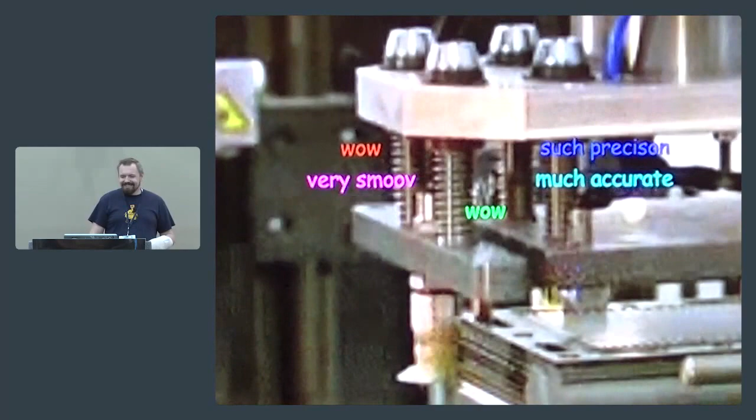So here we have, I forget what this one's actually called, the Kukubot, something like that? Kukubot, yeah. Wow, very smooth, such precision, much accurate.

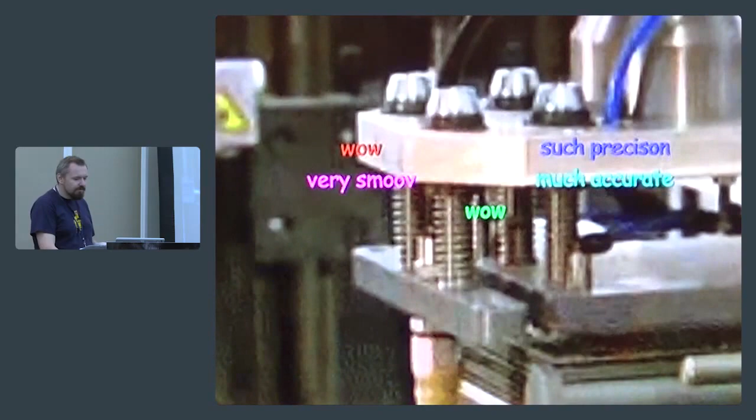But we also make robots to do cleaning for us that simultaneously entertain our pet and us. So this is a cat riding a Roomba, which I think Roombas were probably designed with this in mind, because it's got this perfect cat-sized perch on top. This GIF is missing the duck, but just imagine there could be a duck in there too, being chased by the cat on the Roomba. The internet loves ducks and cats and Roombas.

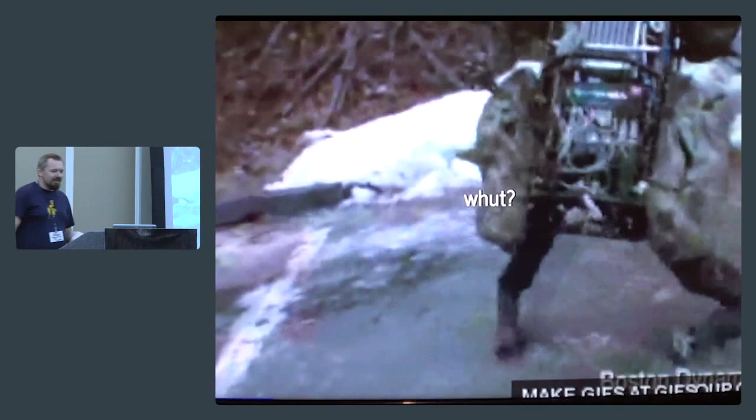DARPA - there's also things, it really creeps me out. There's a video where the guy comes and knocks it over. You kind of feel bad for it, but not for very long. So unlovable, look at it. There's some fantastic parody videos though. What makes up a robot - the robot anatomy, as it were.

Sorry for before when I said we wouldn't help you figure out how a robot thinks. I was just nervous because I really like you guys a lot.

We're going to help you figure out how robots think and dance and sing and all that. The main part of a robot is the CPU, kind of the brains part of the robot, and there are several different options for this. Sky's the limit. I think you all have Arduino Unos in your kit. It's a very popular microprocessor board. You can program it to run servo motors and do everything you'd want a robot to do, pretty much within limits. It's pretty simple, doesn't do Wi-Fi stacks or operating systems, but we have other solutions for that.

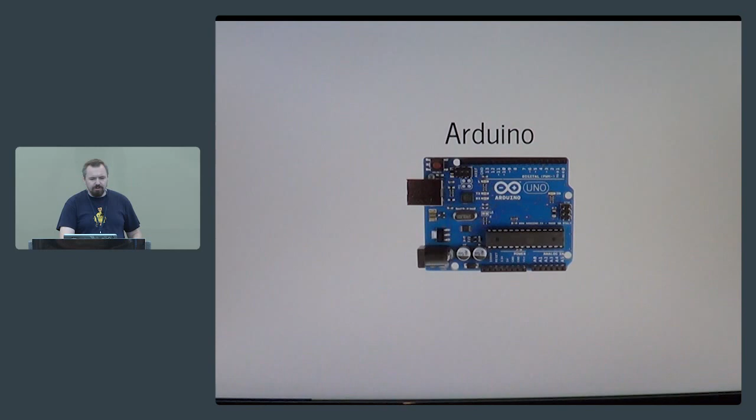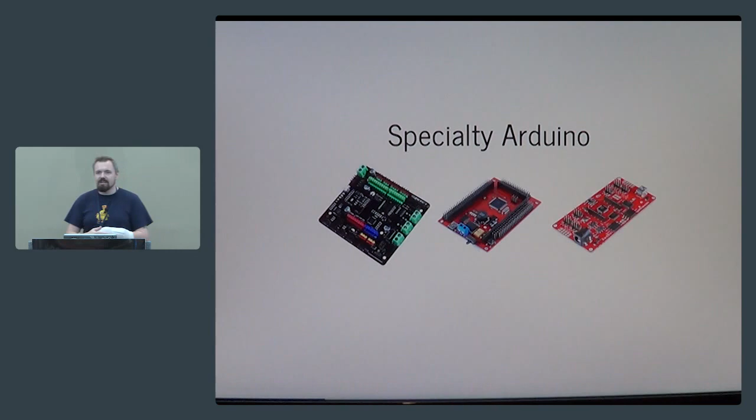There are also specialty Arduinos. Here we have the Romeo, the Spider board, and the Red board, which are basically Arduino chipsets that have extra things on them like motor controllers and power supplies, making it a lot easier because they're specialty made for robotics.

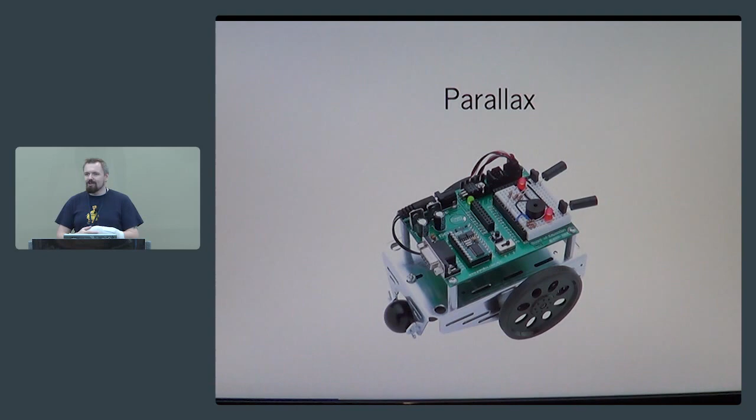The Raspberry Pi has a number of GPIO ports which control motors and things like that. It's basically like a very small Linux computer—it runs an operating system, boots up, but takes a lot longer to boot up than an Arduino by itself.

Jonathan has actually built a robot that features a Raspberry Pi and an Arduino. I'll have it on display—it runs Johnny 5 on it. I have a node server actually running Express and Socket.io, so then I have a website you can go to. It broadcasts its IP, and you can control it with a touch interface or mouse if you're on desktop, so you can drive it backwards and forwards and turn around from anywhere on the internet. It was super easy to do. If you're interested in cloud connected stuff, especially Raspberry Pi is a great base just because it's lightweight, uses little power, and is fully programmable.

Why would you use both the Arduino and the Raspberry Pi? Well, one, I want to use Johnny 5 because I love Short Circuit—that's my opinion. With the Johnny 5 and the Arduino, development of the robot is actually pretty trivial. It's sort of turn on, move forward, and Johnny 5 helps you do a bunch of that stuff. You could also do multiple boards—one for the arm, and another for the legs if you're building a walking bot—so it gives you a little more flexibility. Then I get to write full node on top of the Raspberry Pi, so I can do the web server and open sockets. Basically it just makes it self-contained. If he had not had the Raspberry Pi to run the node, you'd have to have a cable and chase his laptop around with it.

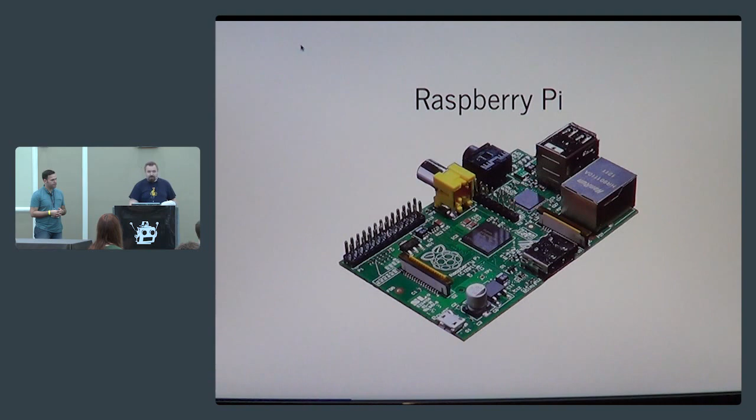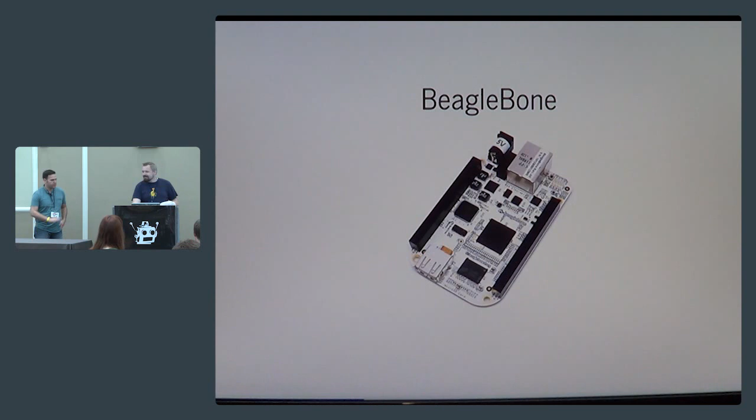There's also BeagleBones, which are similar to Raspberry Pis, but have a little bit more of everything, like more CPU and more GPIO ports. They're also maybe a little better built and organized. It's easier to hack on just because the pins are better spaced out when you start getting more advanced with the Linux base. We have a number of them around, so feel free to grab one and learn about it and use it.

Mindstorms—these are very basic bricks. You program them with drag and drop programming blocks, and there's ways of overriding the operating system to use Lego OS, I think it's called. Yeah, it's built by Lego—that's the key thing. It's a whole kit, they're pretty cool. It's a great way to get started because you can just block the Legos together, and it's really fast for prototyping.

There's a number of upcoming boards like the Tessel and the Pinoccio, which I think we'll have a couple of Pinoccio dev boards on site here, and an Espruino. Some of these run JavaScript natively, or almost natively, through a cross compiler. A lot of them are shrunk-down Arduinos that have built-in Wi-Fi and things like that. So there's a lot more down the pike than just Arduinos.

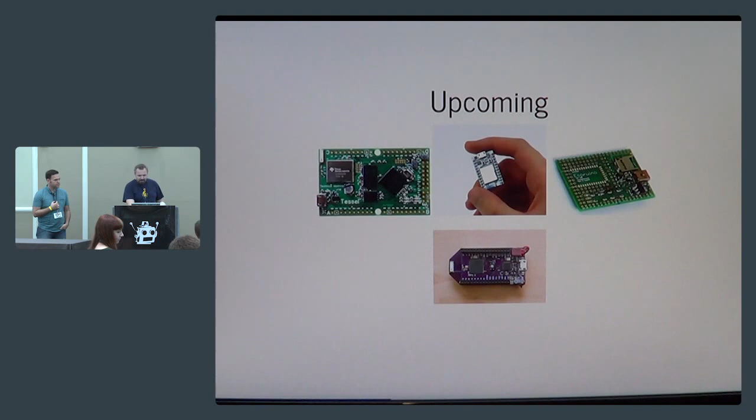We're going to talk about motion articulation, or what makes robots go. This is the Ministry of Funny Walking walk.

The base thing is a DC motor. It's basically just a DC motor. You see it in a lot of toys. You give it power, it goes. You cut off the power, it stops. You change the wires around, it'll go backwards. You'll see it in a lot of toys.

In robotics, you won't usually see this size because you need an H-bridge to make them go reverse, but on larger scale robots, like things made on wheelchair bases, you will see them because they're just very powerful.

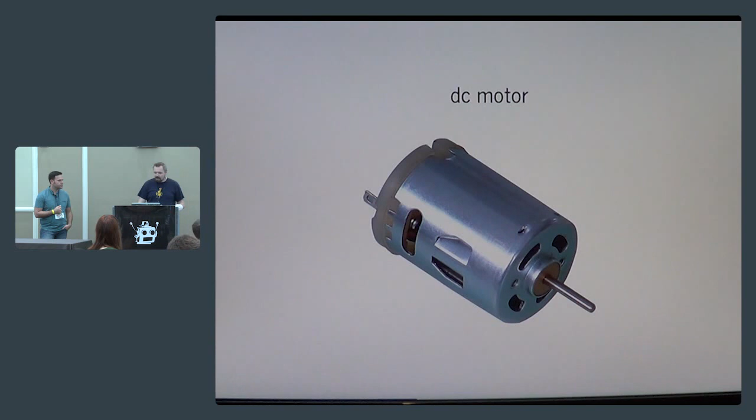More often in hobby robotics, you'll see what are called servo motors. They have a DC motor in there, a potentiometer, and a number of gears that increase the torque and slow down the motor a bit. It's a lot better for finer control.

They come in two varieties generally. Full rotation servos, which you just tell to go 90 degrees that way, and it'll start spinning that way at a certain speed and won't stop, and it can reverse. But normally they just go between 0 and 180 degrees for the standard servos. You can take a standard servo and modify it to be full rotation by taking it apart and snipping off a little bit of plastic, and you have a full rotation servo.

I believe most of what we have are S148 Futaba full rotation servos. You can use them for moving tires around and things like that, robot heads.

That's the best point. The reason you use a servo motor is for puppet-like movement. So moving a finger, maybe if you're making a cool mask or an animated sculpture. They're great because you can position a bunch of them, if you have enough pins, to an accurate position. So they'll stay in this position. I can do one more position, but there's kids around. It's a lot of flexibility with the precision.

They're cheap, pretty precise, easy to control. I don't think robotics would be around without these, or it'd be in a much funnier state. Because when you look up robot sound wave or something on Google, that's probably a servo motor sound. They're very distinctive and cool.

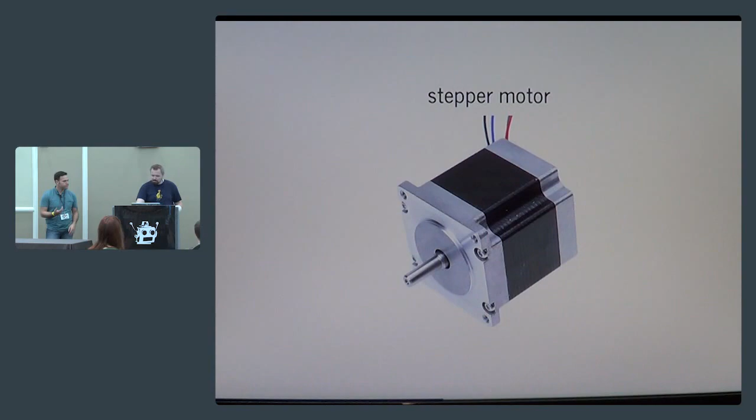So robots can move around on wheels. These are just two servo motors hooked up to wheels, and this is Susan's kitty bot, which she built for NodeBots Day. So two servo motors move the wheels independently. You move both motors forward to go forward, both motors backward to go backward. You move one of them to turn, one forward and one backward, to turn really quick.

There's a little ball caster, kind of like ball deodorant or something - it's upside down and rolls really easily. It's made out of a ball bearing and a 3D printed casing, but you can buy them pre-made. It just increases the motion, lets it slide around pretty easily.

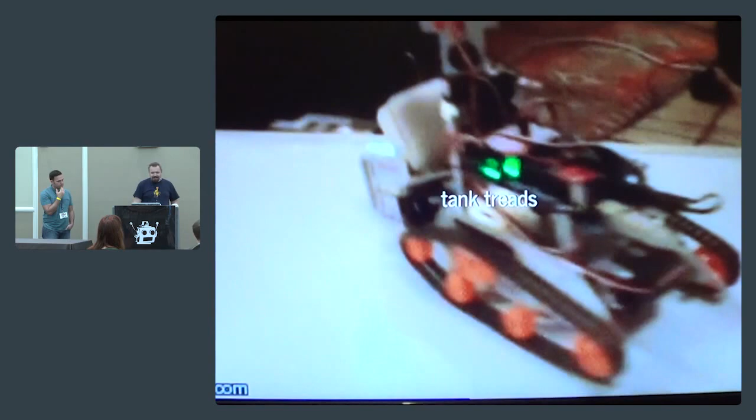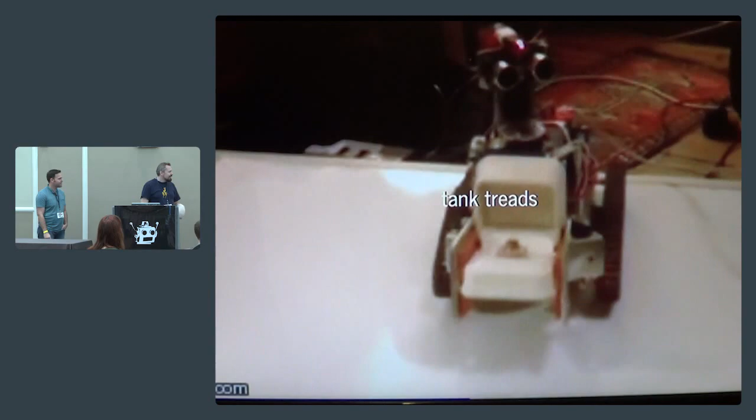You can put robots on tank treads, which are kind of like wheels but have larger surface area and better grip. This happens to be, I believe, the robot that Rick Waldron used to propose to his wife. So there it is with the ring, and she said yes. Surprisingly.

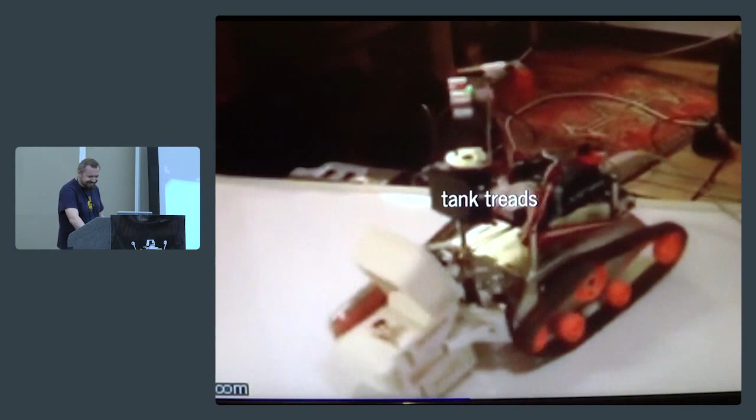There are bipedal robots, which just means two-footers. Not two feet tall, but two feet. They walk awkwardly, but depending on how many servos you have, they can have really graceful or funny gaits. They're not super practical, but they're cool.

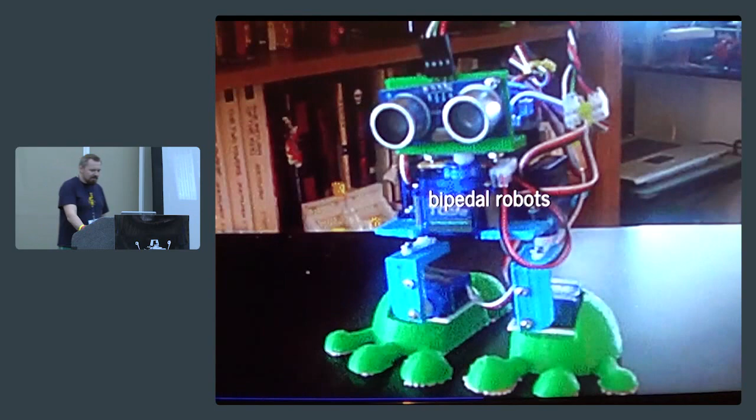You can mix wheels and bikes and create like hipster fixie bots. This one can pedal and wave, and it's really impressive, but it's a hipster bot.

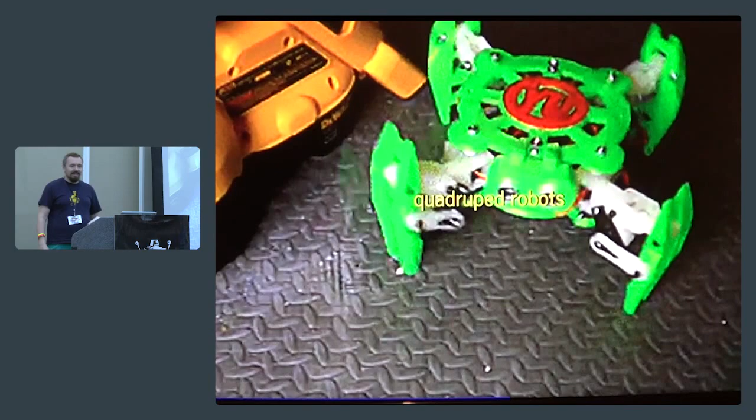You can have robots that have 4 feet, and they're quadrupeds, and robots that have 6 feet, and they're hexapods. Usually these multi-legged bots are patterned after some sort of animal movement. This one, surprisingly, is called the turtle bot, I think. It's pretty cool. Rick has a quadruped that's a little bit different than this—looks like a creepy spider. Over in the robotics table, you can come take a look at it, and it's really cool actually.

Some of you have gone to the drone room—there are robots that fly. Every time I see one of these, I think of the Terminator, Rise of the Machines, and the Matrix, but that's just me. They don't sound creepy when they're flying at all.

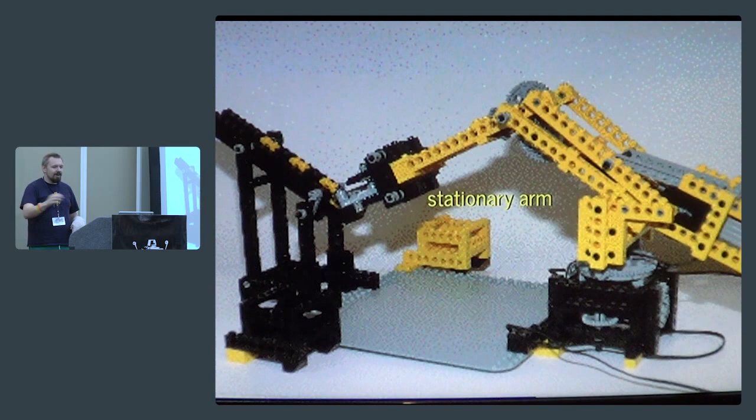Not all robots move the whole machine. You can also have stationary arms that reach out and grab things. We may or may not have a pneumatic robot arm working at the robotics workshop table soon. We'll see—if it all works out, it does.

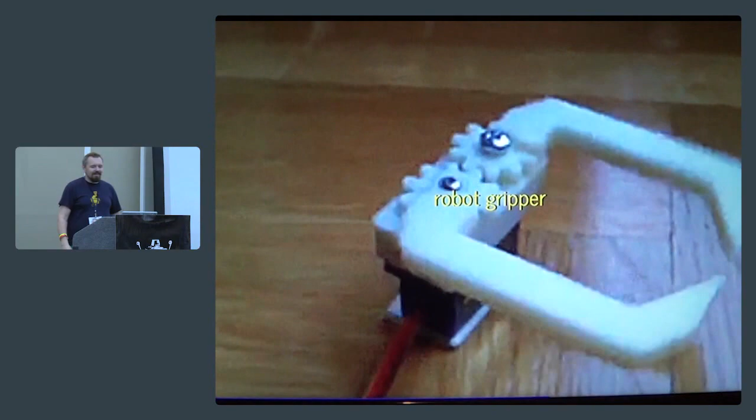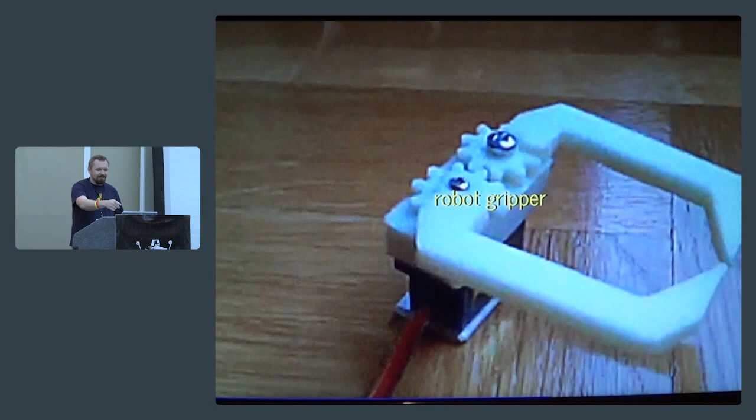On the end of those arms, this is a servo that's been converted into a robot gripper arm, which shows how articulation works. You just have little claw things, a free spinning cog and a motor-turned cog, and you have a gripper. It pinches stuff. You could 3D print this today and grip stuff, because that's what you do with a robot gripper, presumably.

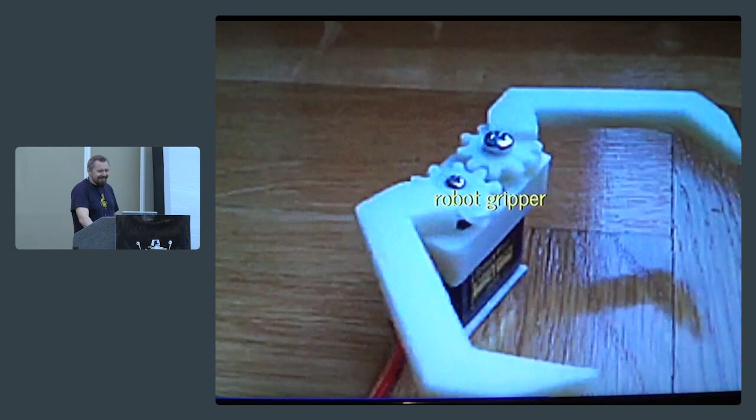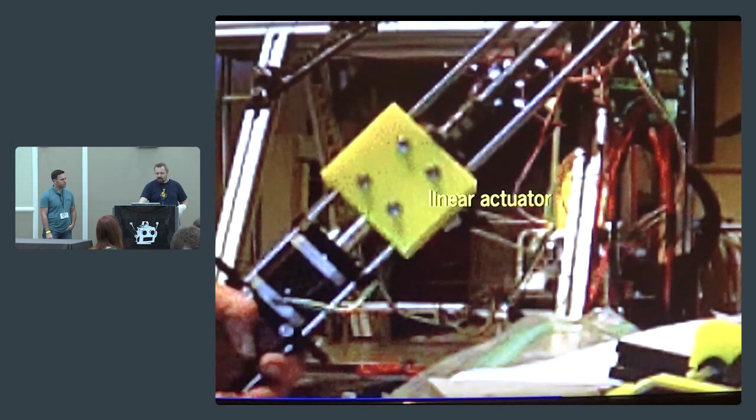Most of the motors we've seen just go round and round, but there are different ways of converting that motion into linear or other kinds of motion. This is one—it's a linear actuator based on a screw drive. There's basically a screw and a captive nut, and it just moves back and forth. That's one way of doing it. You could also do it with a rack and pinion, where the motor drives a gear and an unrolled gear that moves back and forth.

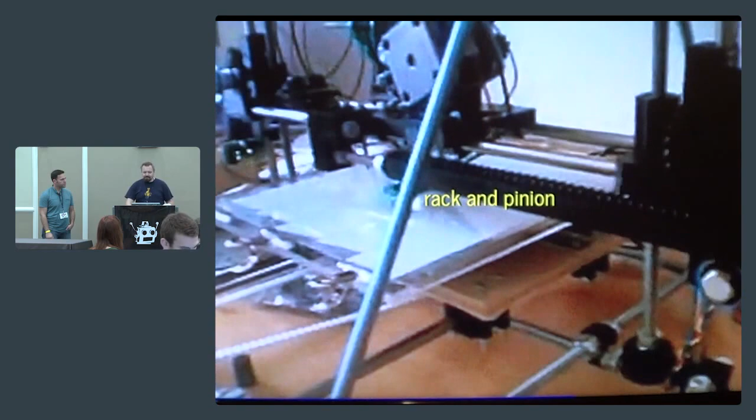There are many different types of mechanical actions, and if you want to make a robot that moves a certain way, I'd encourage you to check out this free online book, 507movements.com. It was published around 1868, but it details pretty much every type of mechanical movement you'd want. As a bonus, it includes animated GIFs for a lot of them, so you can really visualize how it works—like if you want a robot that does this, you just build these two rack and pinions and make them move in tandem. It's really cool. Mechanics hasn't really changed that much, and it's very useful and cool and free.

The other part of robots is sensors—things that take in information from the outside world. There are a number of them. Micro switch is probably the most popular; it's just a switch, you bump it, it goes on and off.

A lot of times people use these as bump sensors—you have a little plastic stick or something, it bumps, and the robot realizes 'oh, I hit something, I better back off.' A lot of the 3D printers, CNC machines, and laser cutters that we have use these as end stops.

So when the stepper moves the print head all the way to the left, there's a little micro switch, and it goes boop, oops, I've gone to the end, and knows to back off. It's probably the simplest sensor you could put on your bot.

The switch is like the most basic electronic component, you can use 2 wires. Some beam robotics projects try to use no CPUs, just electronic circuits, with 2 basic spring wires, and when they touch, now you have a bump sensor, so they know to turn around. It's really easy to code too, so any Arduino can do this, or you can even use a bunch of transistors and build some sensing logic with just stuff. Just, oh, I should turn around.

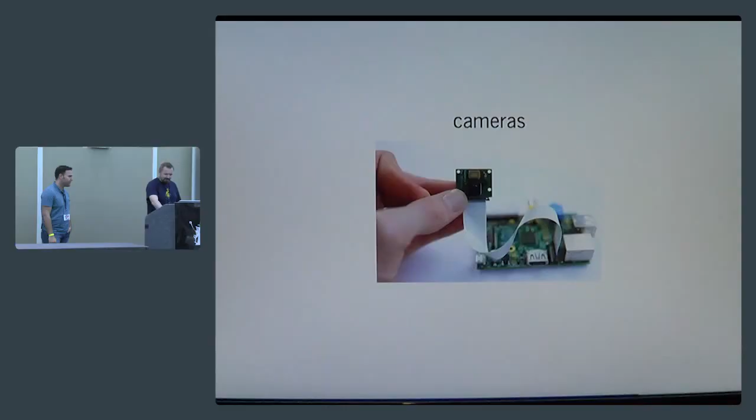Yeah, definitely beefy. There is the CMU cam, which is pretty hard to find hardware, and they're just making the CMU cam 5, which actually has dedicated hardware that does color tracking, and you can train it. It just says there is a purple dinosaur in the upper right corner of my camera.

Kill Barney. You have to go, people remember Barney. Oh yeah, okay, my people.

Accelerometers. So these are, you have them in your phones, and they basically detect...

What's going on? Everything's fine, don't worry about it. The robots are coming.

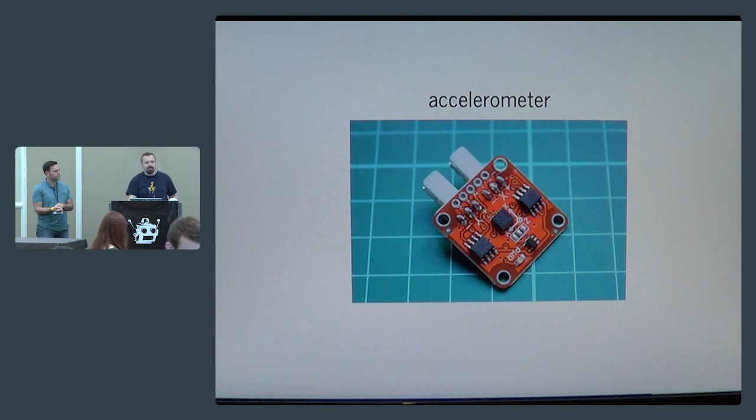Accelerometers detect motion in the X, Y, and Z coordinates. So if you take your robot and shake it this way, or want to have stop motion detectors or whatever, we have a bunch of these in the Tinkerkit form. I don't know what you'd use it for, like some sort of crazy arm that waves around or something, figure something out. You can use it to control things so that if you swing a stick this way, the robot will go this way. But basically they track G-forces on the chip, and it'll tell you how much force is applied this way, and you can use it to control things.

GPS modules, they basically make robots that know where they are all the time, which is creepy, and you can use them to route things around your neighborhood. These are pretty cheap now, you can get them for maybe 30 to 50 bucks on different retailers like Adafruit.

Taco Bot, yeah. We have friends that are working on a thing on a wheelchair base called Taco Bot that is meant to go and deliver tacos throughout the neighborhood. Let's see that one coming along, I'm sure you'll get an update next RobotsConf.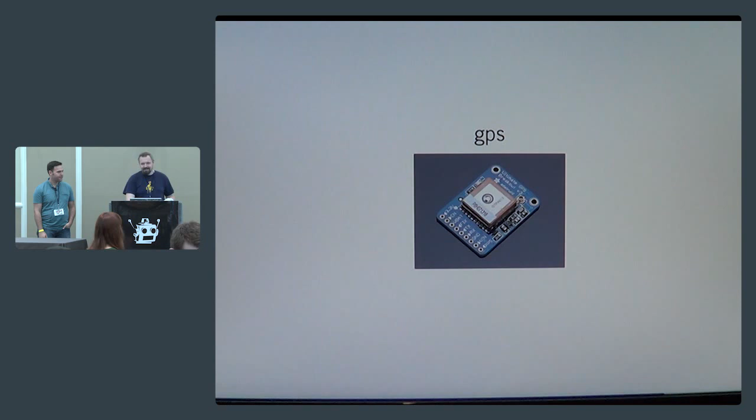Reflectance sensors, these basically measure the reflectance of materials they're put up against, but most normally they're used as line detection for bots. If you've entered a robotics club or competition before, usually one of the simple things they have is follow a line, and this is what you'll see used there. You usually use them in rows of 3 to 6, and they will detect a line, and you can program the robot to follow along the line. It's kind of like the bump switch, right? Yeah, it's using light instead of physical contact, so for interesting terrain it's better.

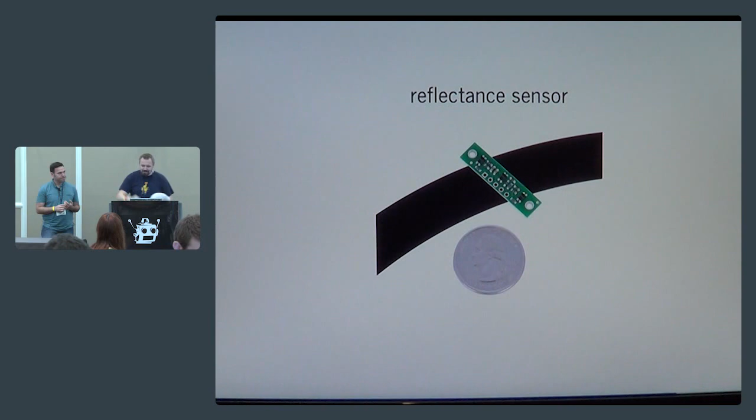Because you don't have to worry about being rubbed or getting caught. If you wanted to do a carnival ride around your neighborhood, you could draw a black line, put a wheelchair base on it, sit and drive through like a dinosaur forest or something. Be cool. Just ideas, these are ideas.

Sonar rangefinders are basically proximity sensors. They work like bats, like Raquel's presentation with the bat bot. It'll send a sound, it'll bounce off something, and it'll come back, and it'll absorb the sound, and it knows approximately how far away that thing is. The dolphin bat sensor.

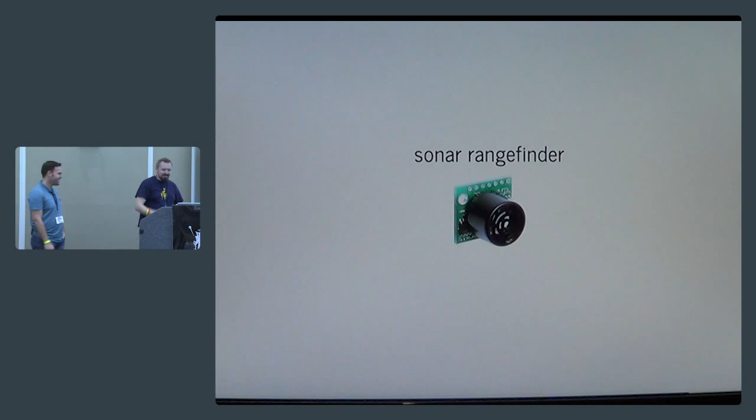Light sensors are luminosity sensors, kind of the inverse of LEDs, they absorb light and can tell how bright something is. If you wanted to make a robot that sits in the middle of your kitchen and scurries under your refrigerator when you flip the lights on, you could do that with this. I'm actually in the middle of building a digitalized foosball table using lasers and light sensors. Whenever somebody scores, it breaks the laser beam, and the Raspberry Pi says the signal's broken, so it posts to our servers and updates the score. Super simple to work with, too.

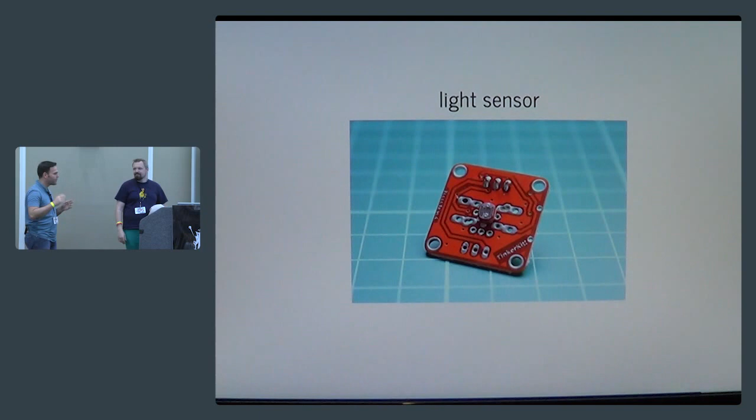Thermistors are basically temperature sensors, so if you want bots that sweat or something, I don't know what you'd use this for. When the temperature hits this much, sweat. But they're available, I think they're in the TinkerKit as well. You could use them for finer operations like a coffee-roasting bot, things like that. You might want to use a digital thermometer for that though, something more precise.

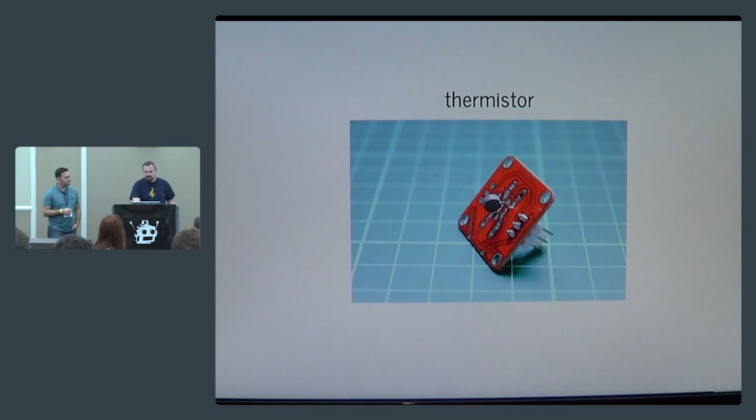But they're cool. Gyroscopes are kind of like accelerometers, except they work on tilt, kind of like those old Mercury switches. If you wanted a controller on your wrist and you tilt it, you can make the robot tilt that way, or a robot will know how it's oriented with this gyroscope, and you can flip it upside down. It's like, oh, I need to get back up again.

I'm a turtle. Yeah, so the accelerometer, gyroscope, and GPS are sort of core to drones, and the main purpose for putting those on drones is to fix position. So it says, stay right there. By knowing its rotation, acceleration, and fixed position with the GPS, it says, oh wait, it's getting windy, I should go back. You can take that same logic and apply it to a roller bot with one giant wheel, or one of those Omni wheels, and you can balance it.

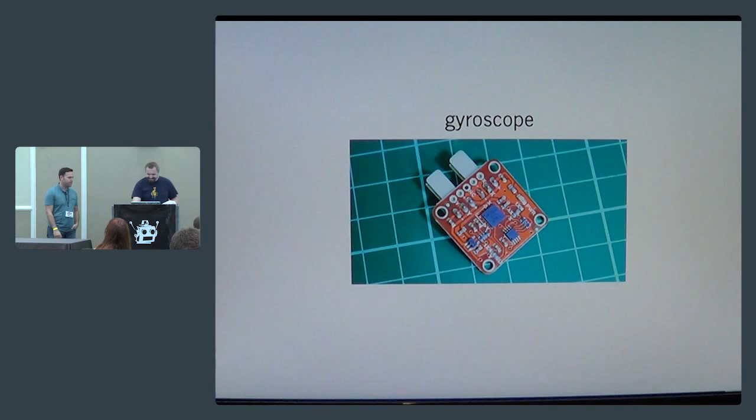That's about it. So what happens at the workshop? Well, glad you asked, we will help you. There's no workshop, I mean just come to the hack day, the open hack thing. That's what I meant, we will help you build your dreams. Within reason, we probably aren't going to build this thing, but we can get you started for sure.

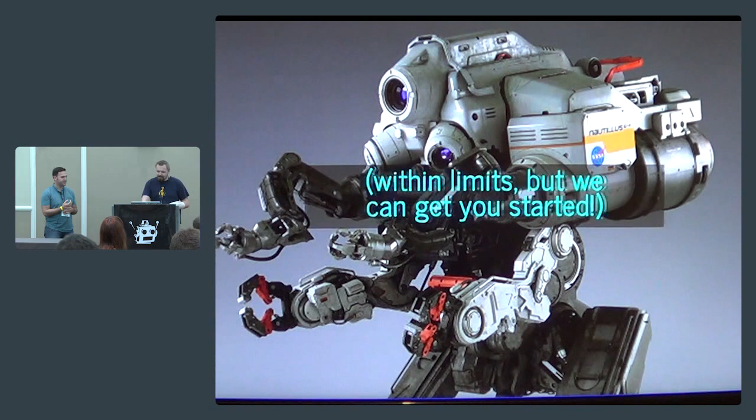So this is all the stuff we have, almost all the stuff we have. There's Arduinos you guys have, a bunch of TinkerKit components, we have a couple Mindstorms, I brought a bunch of woodcut SumoBot Junior kits, I think there's like 50 of them. There's more than 50 of you, so team up or be the first to grab one. They're basically slide-together robots, looks like that. It's a good start for some people, other people might want to go in whole different directions.

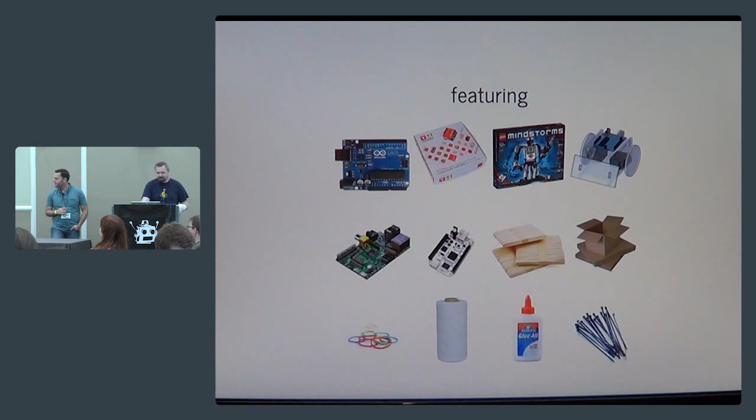Raspberry Pis, BeagleBones, popsicle sticks, cardboard, rubber bands, strings, glue, and zip ties. There's no limits, just use anything you see laying around, as long as it doesn't look expensive and doesn't belong to you or Chris, I guess. But not Chris. Like, within reason. Just don't start hacking up the tables, I guess. Maybe don't set the place on fire. Don't set the place on fire. Or write on the walls with Sharpies. Sorry, I told them already.